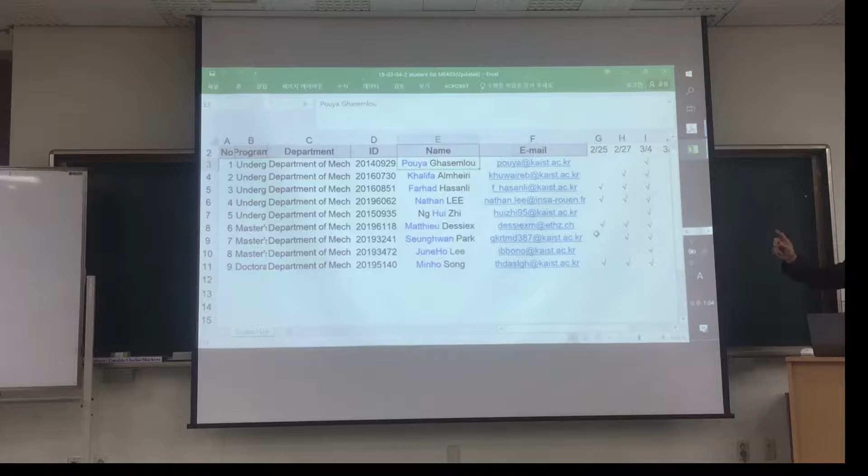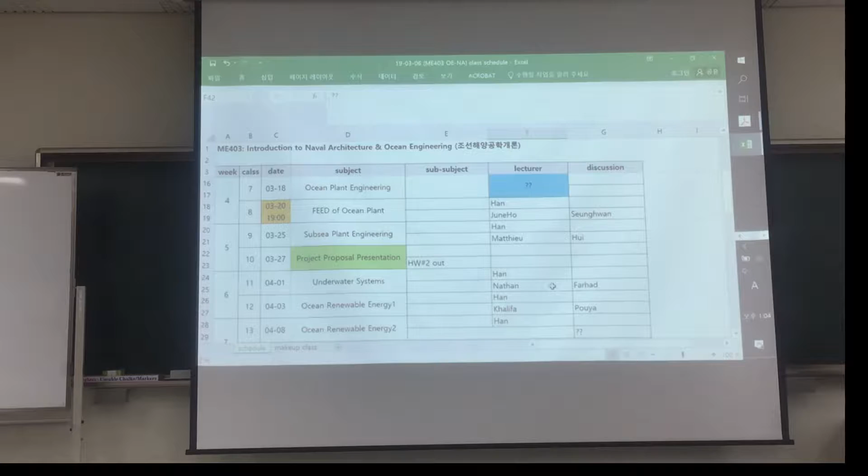Minho, JuneHo, right, I'll change this one. All right, and you get this one, but it is very tentative. I just write down your name somewhere, but it will change. Last night I just made this one, but this one is very similar to last year, so I just copied and changed some of it.

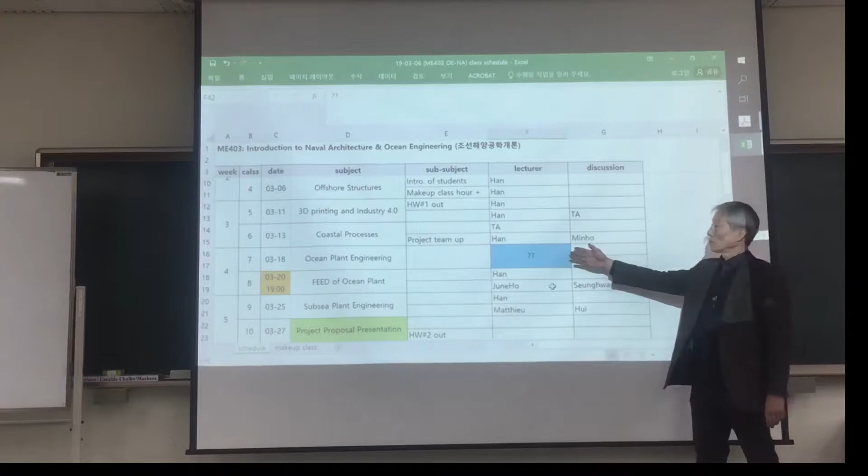And this was a special lecture by another professor. And sometimes this one means late evening class, because of my trip, sometimes I go abroad using video and online teleconference tools. I found that using teleconference is better than delaying lectures or rescheduling, so nowadays I prefer to have one, but it depends on the time difference.

So this time I have a plan to go to France, Toulouse, in May. At that time I found that 1 o'clock is not good for myself, so I may try, say, 7 o'clock in the morning. Then for you, what time would it be? 8 hour difference, so it's 5 o'clock something. Anyway, we will find out the proper time.

And also sometimes we need replacement hours, in case you reschedule time or day. So we will find out today's makeup class hours, something like this. You will find out the available time slots of the whole week for 9 people. I guess your class schedules are fixed.

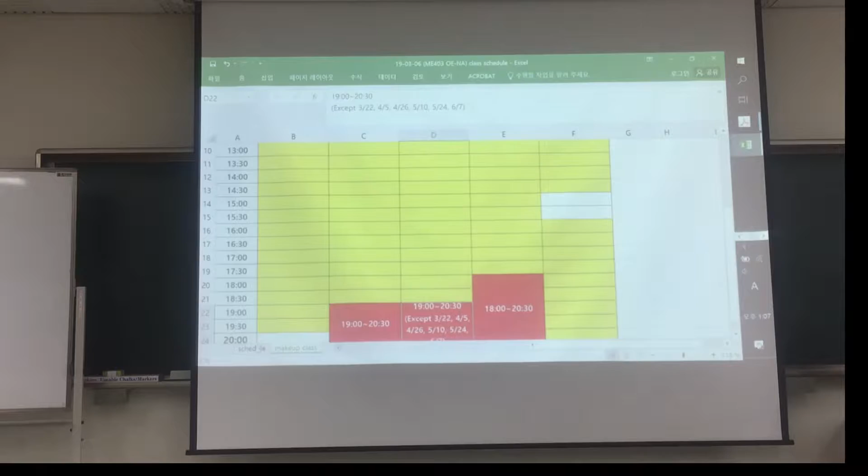We'll do that today. And also introduction of students - you will each have 1 minute to introduce yourself near break time, after 30 or 40 minutes.

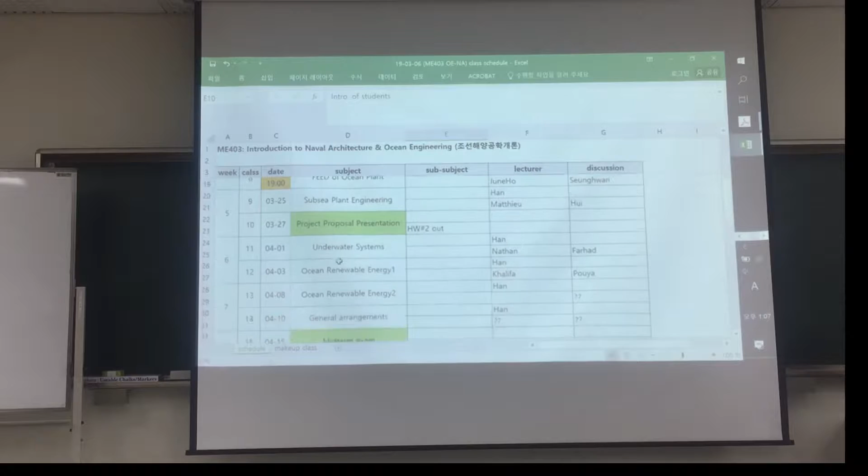So this is the project proposal presentation and midterm exam. This is the exam, proposal, and special lecture. And for this one I will have a plan to visit Toulouse, France, so we'll find out the proper time. Fortunately, if we do it this way, then one class can serve as the midterm exam.

Do you have the exam week schedule? Can you check whether it is the same week as this one, or whether the whole university has one week of exams - the midterm exam period?

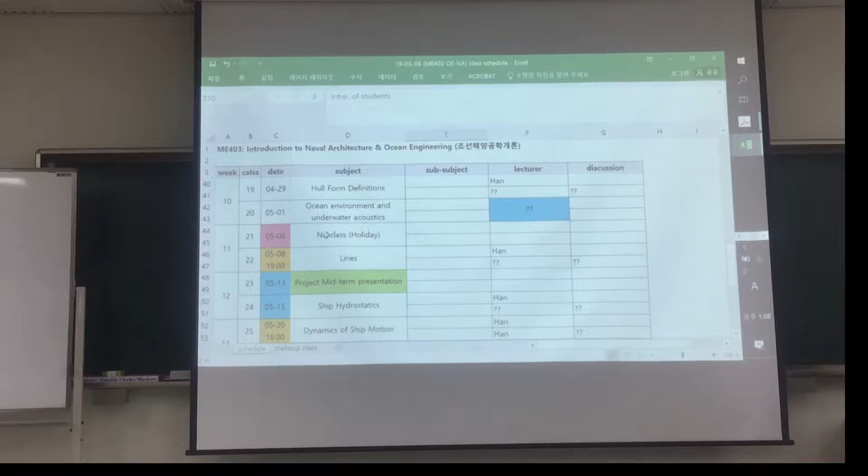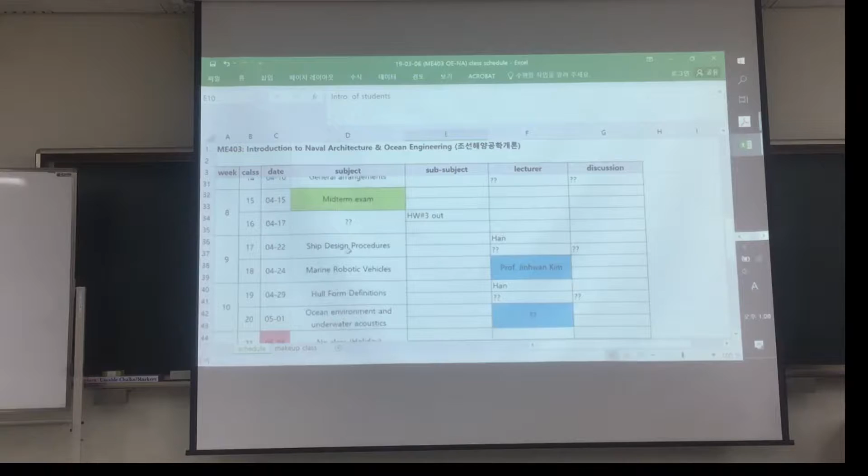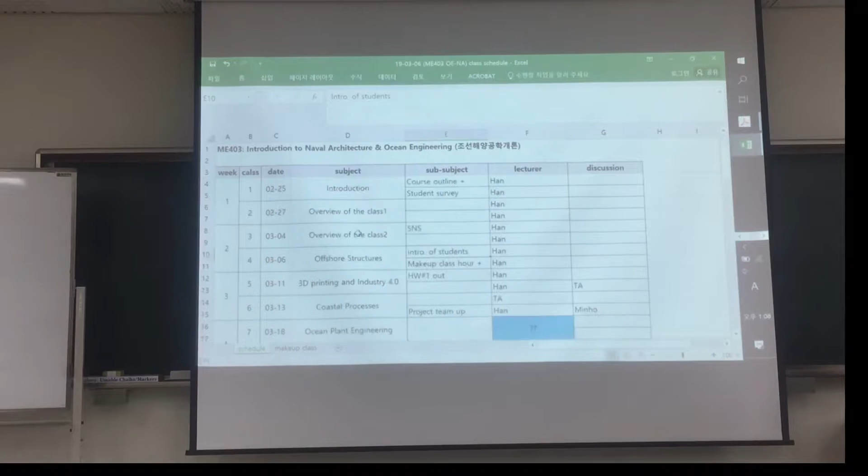Right, okay, so we will change this one. But anyway, you will do it this way. So I hope the TA starts to show how it is operating.

So next week, Monday, TA Kijong will lead your discussion time. After that, right - midterm presentation is the term project presentation.

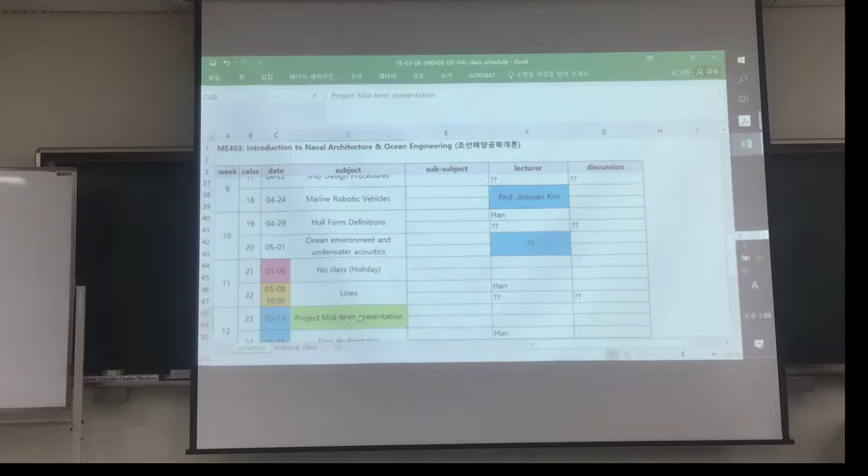Term project is the project proposal. This is a written exam. This is the project, the term project. But these are classes, lectures, similar to my own lectures on chapters of the textbook.

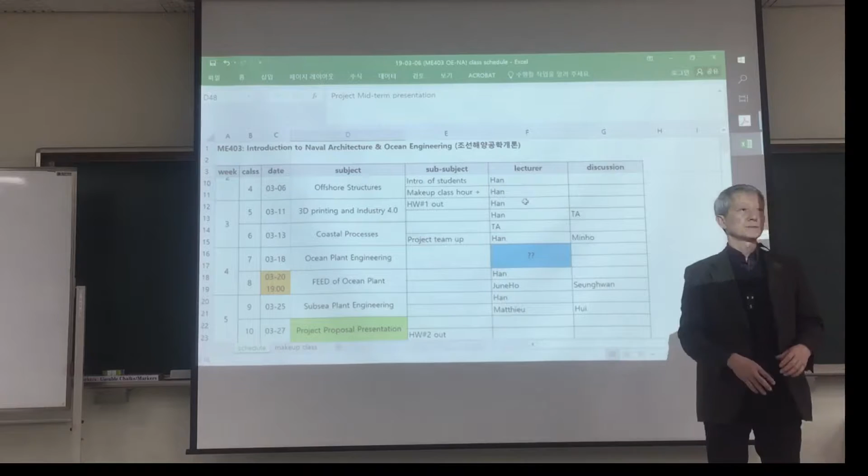Homework? How much time per - sorry, say again. Usually I give you 2 weeks time until the submission deadline.

Same as myself as a lecturer. And I will provide the previous PowerPoint file, the old one, so you can update that one or use it as is, as you like.

And also you can see the previous year's lecture video. There are also student lecture videos on YouTube, so you can see how they did it. It's similar to a lecture - I'll provide the old material to you.

Okay, any other questions? Yes. Right. Right.

Fit the amount of lecture to the time slot rather than the amount of slides. You should finish by 25 minutes. We have 75 minutes of class per day, so I divide them into 3 parts - each one is 25 minutes. So 25 minutes of my lecture, 25 minutes of student lecture, 25 minutes of discussion led by a student.

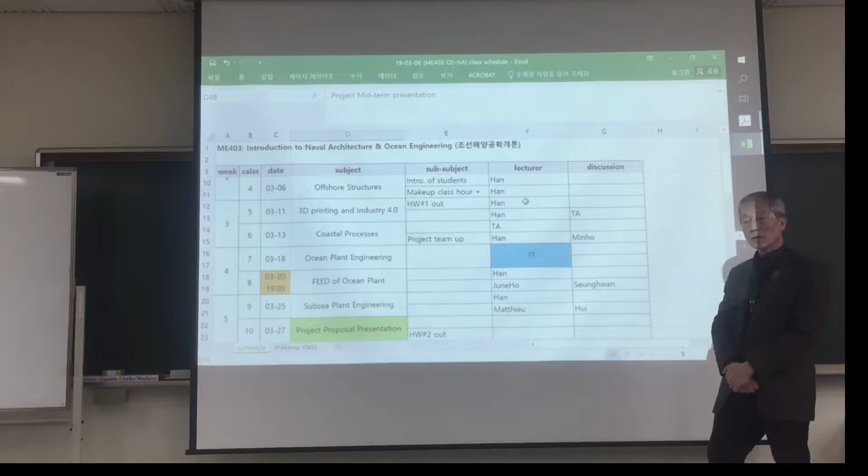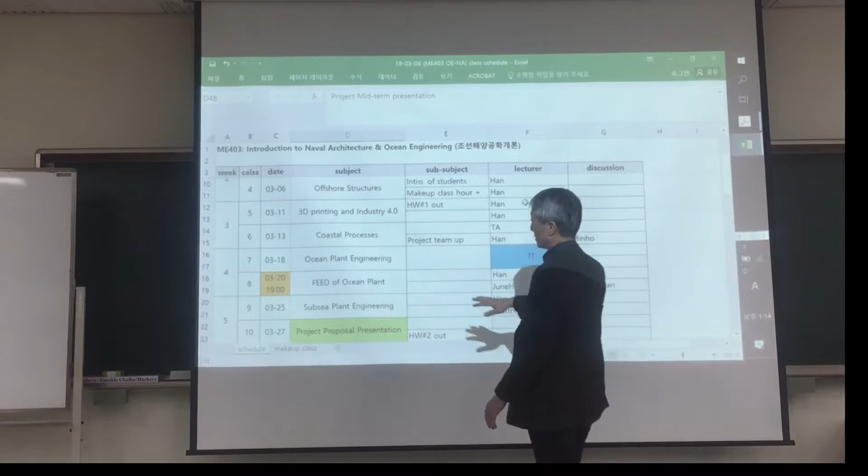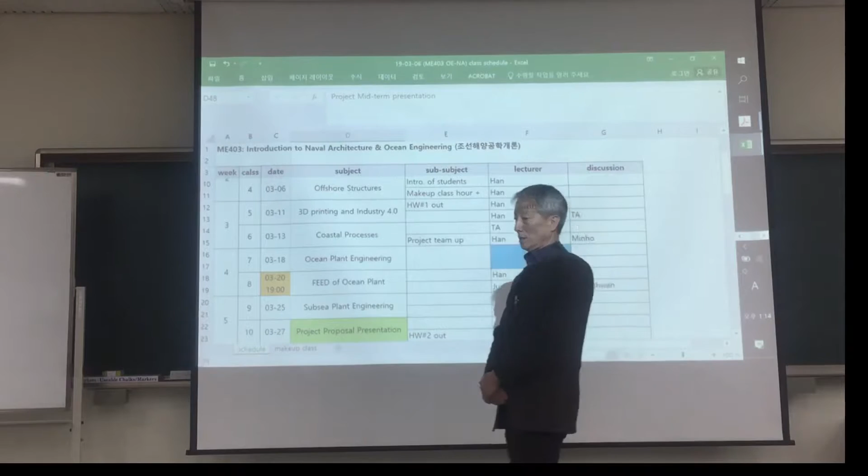Anything about ocean engineering and naval architecture. I provide you samples of previous semester. At the first lecture note and video, you can see it. You can download the first lecture, right? Introduction to the class. At the end of the slide, there is a sample term project which was done several years ago or last year by a student. So that can be a sample.

That was one slide I copied from their presentation. Yeah, project presentation, term project. Three presentations. Yes, so discussion is also a presentation. Discussion. I hope you talk much, communication, discussion. But should there be also a PPT?

Usually the leader provides several slides because he wants to initiate the talk, the discussion. So usually the leader brings questions. So basically they're very similar, right? No. Lecture is one way, right? Discussion is two-way, right?

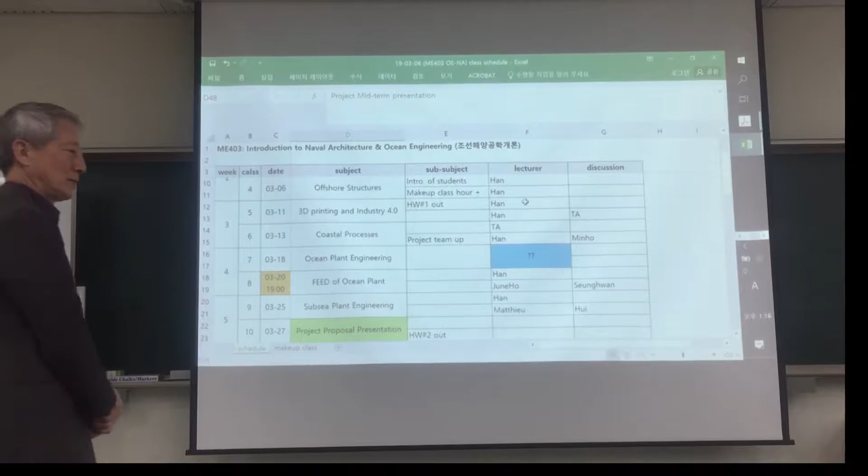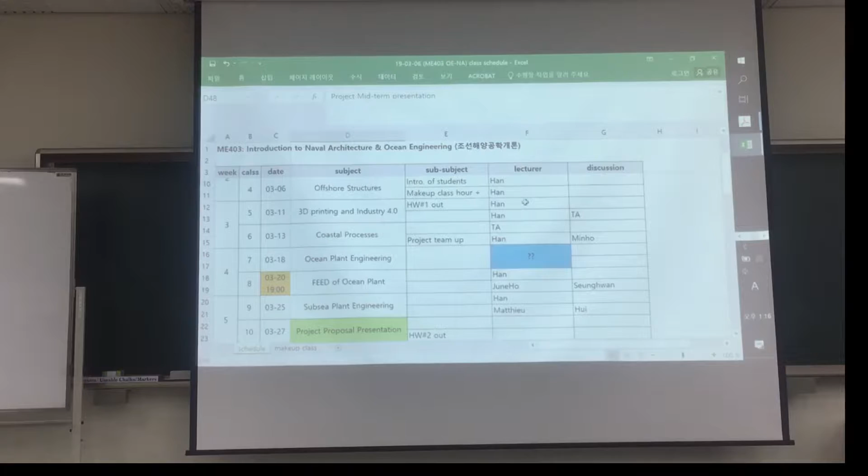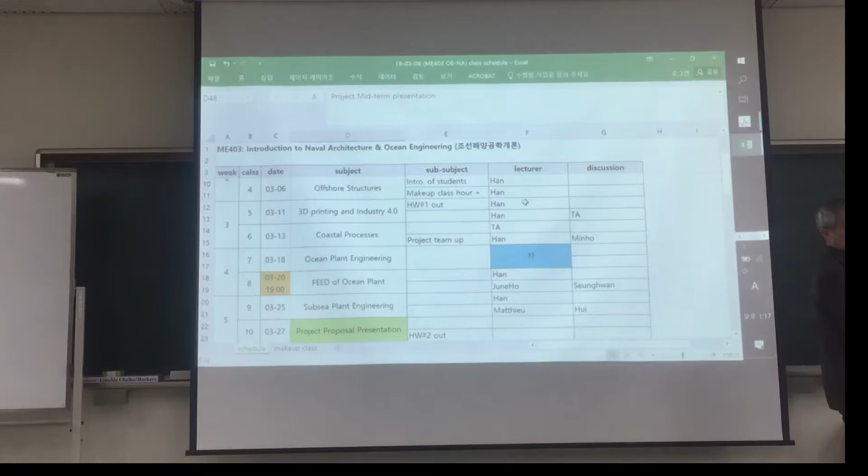So debate. Once I tried to have a real debate, make a party, make two groups, and then you are assigned to agree, and the other side is assigned to not agree, and then try to debate. But it takes more time and effort by yourself. So I just recommend you. So try to see the previous slide. All right. Okay, let's try.

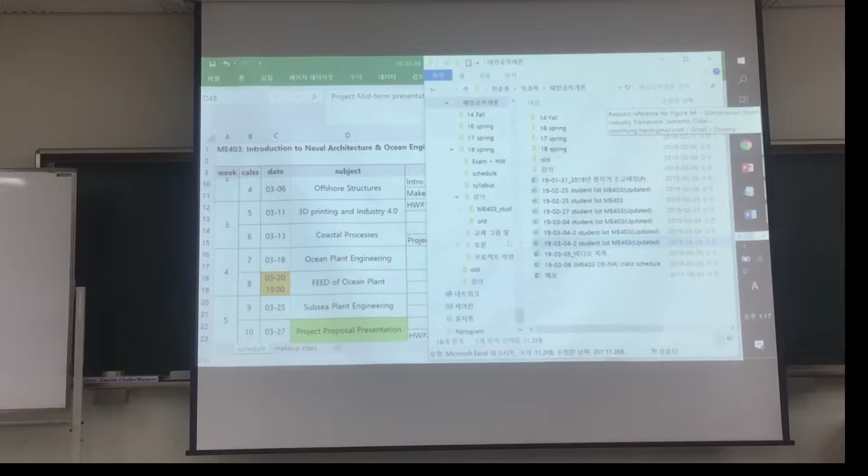I provide you this one, right? Last night, I threw it on KakaoTalk. Yeah. Do you have any problem using KakaoTalk and downloading files? No, it's okay, right? I stopped here, right? Then we can continue.

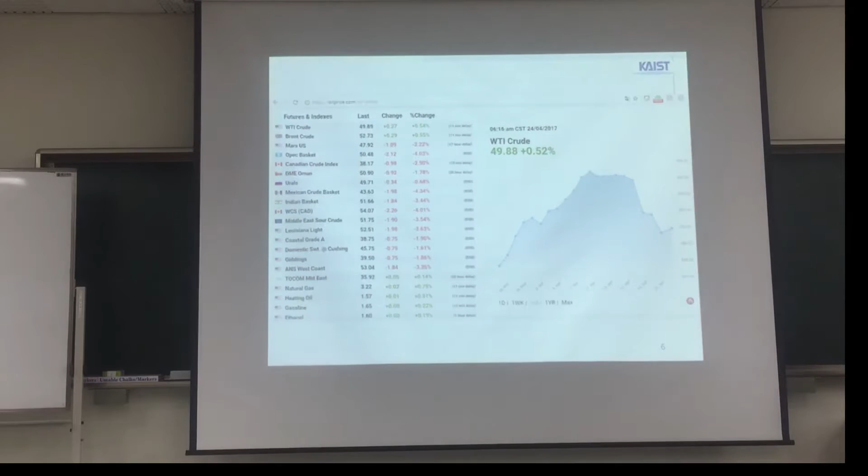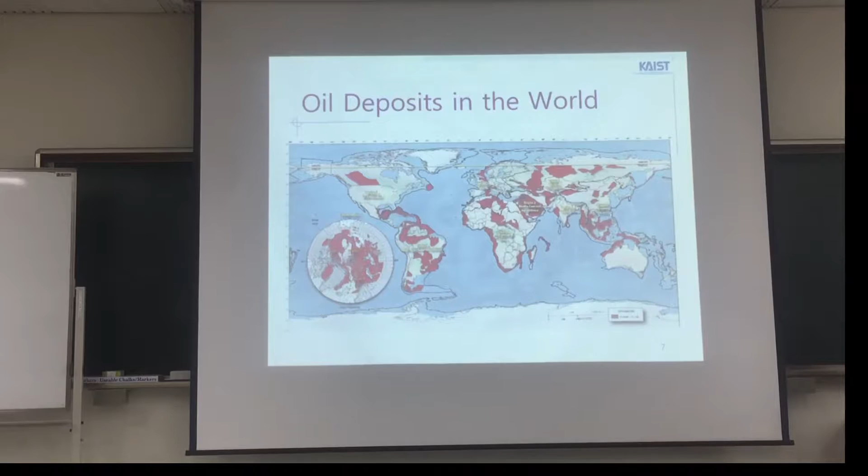Oh, many, right. But now things are changing because of the gas coming from shale gas. But the map can be redrawn. And this is a development picture.

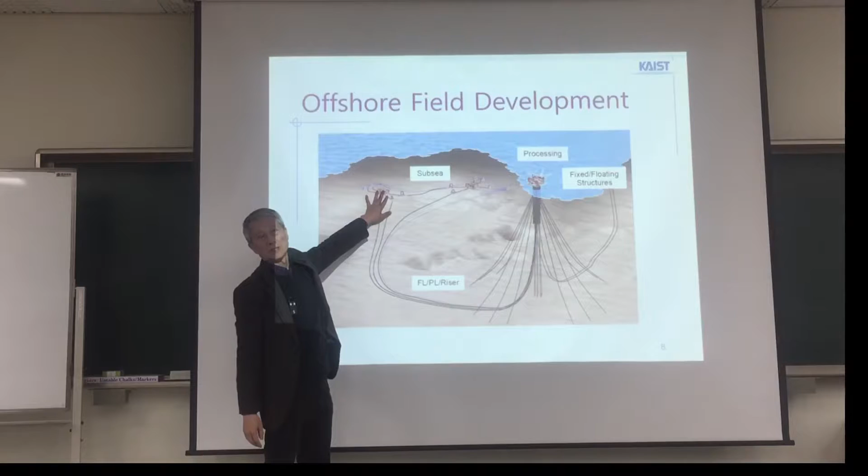Then see that the cable is pipes, right? Pipe. And then subsea, under the ground, say 1,000 meter depths, depending on the sea, ocean. There is a well, similar to the land site drilling for water or oil, right? Oil is coming or gas is coming, and then they collect small productions into a large one and then collect it. So it's something like production rather than exploration.

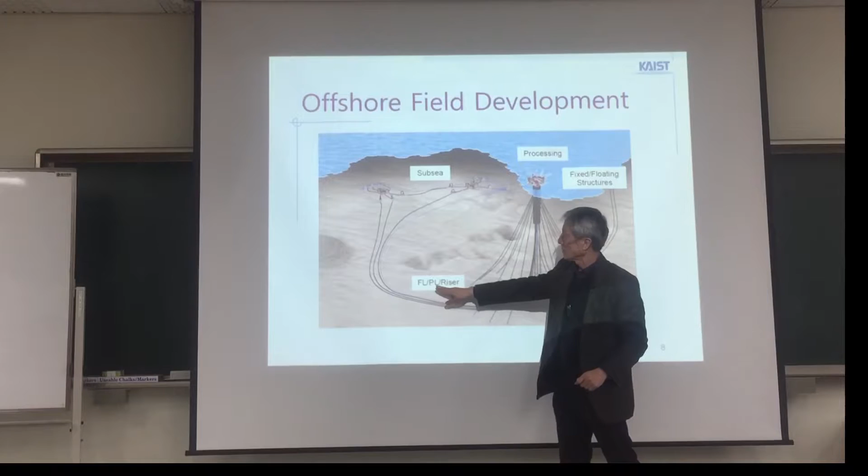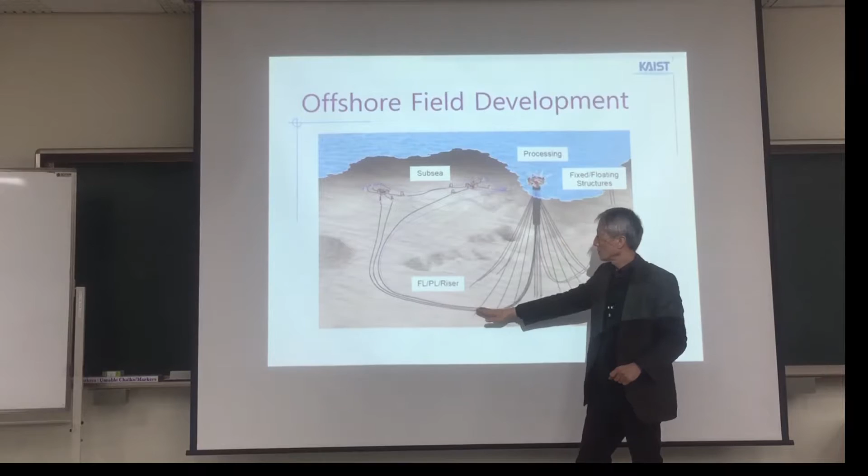Okay, they say they are processing in the subsea unit, and then riser. It says pipeline, flow line, pipeline, and riser is something like the rising part of the pipe, we call it riser. This is a seabed floor pipe, but it goes up to the processing unit. This portion we call a riser.

This is very important. At the Gulf of Mexico, there has been a big disaster, an explosion, about 5 years ago, more than 5 years ago. Very big explosion there, Gulf of Mexico. It was an operation by British Petroleum, BP. So they had big damage from this explosion. And the burning oil lasted more than months. Explosion and burning for a long time.

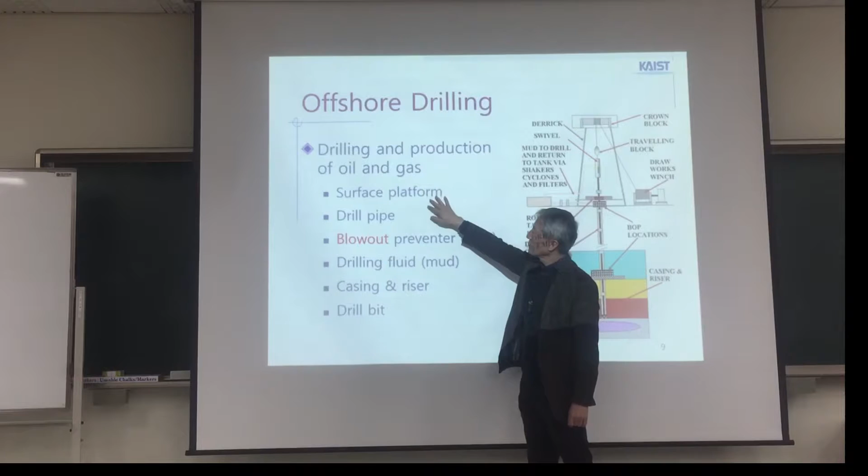And that reason was one of the problems of this part at the time, right? So complex, right? Complex. But anyway, simply this is drilling, right? And the others are supporting material. Drilling and production, oil and gas, surface platform. Surface platform is something like this one. What this means is water surface. And drill pipe.

The pipe is produced by the pipe maker using steel plate, right? They roll and probably weld to make a pipe. Pipe size is something like this one. Not so big, right? Something like this. Not in this way, something like this way. And then it is a finite length. So they purchase pipe and do connection down to depths of several kilometers, right? So they call this a drill pipe.

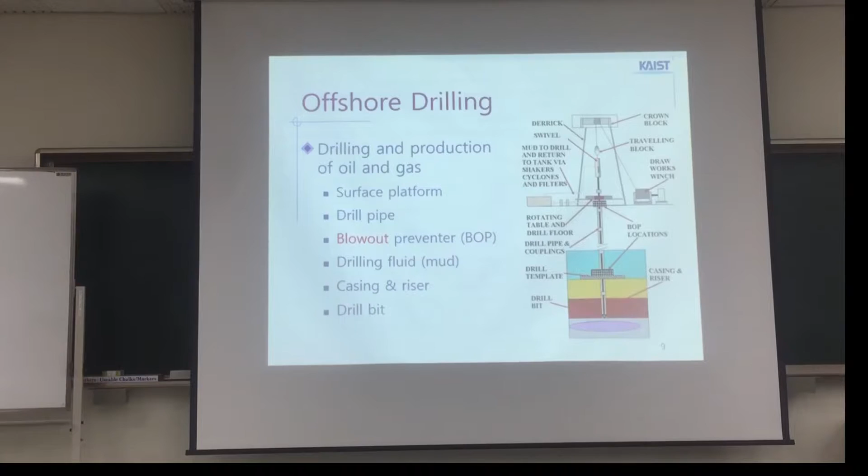And also drilling fluid, they provide some lubrication, water. Usually water is used, but lubrication is needed for the drilling. And then casing, riser, and drill bit is the final stage. We'll see more in the later stage.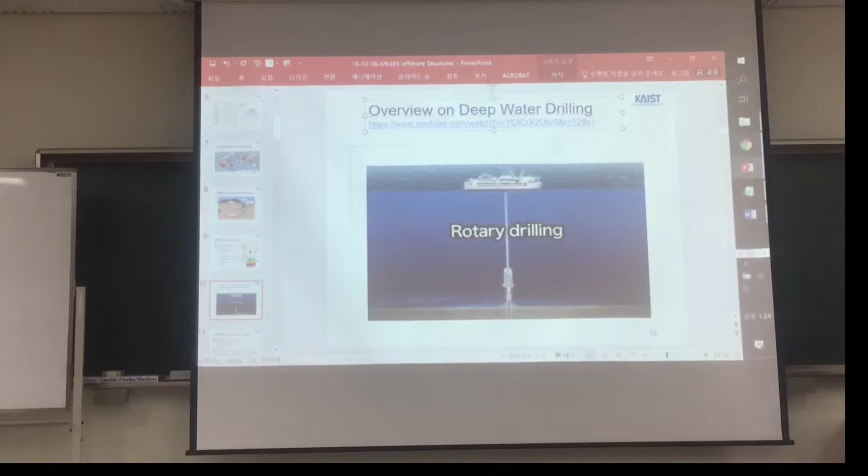Oh, there's a video. Okay. It's not very good. Then, sound. Okay, sounds good.

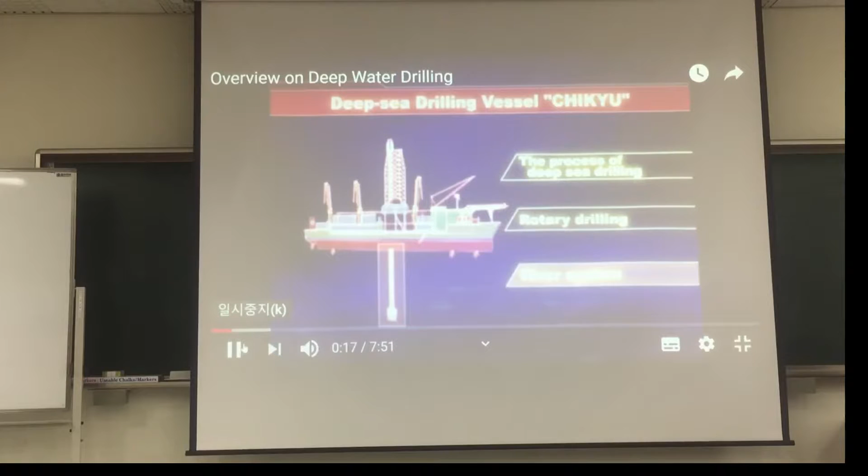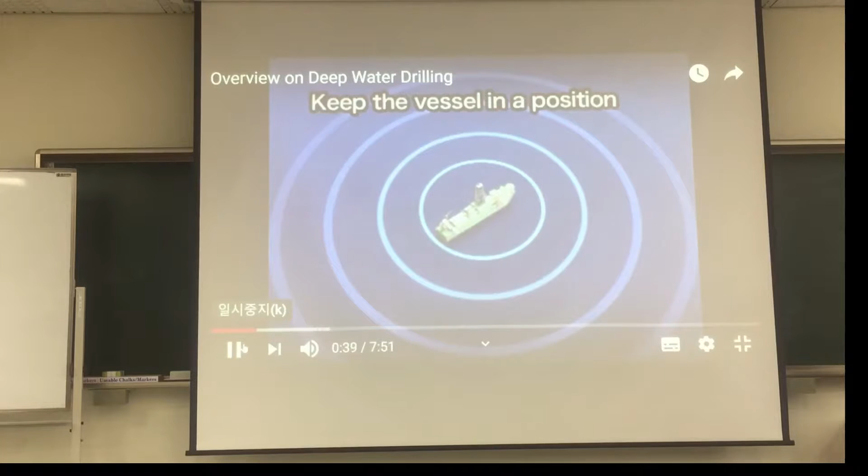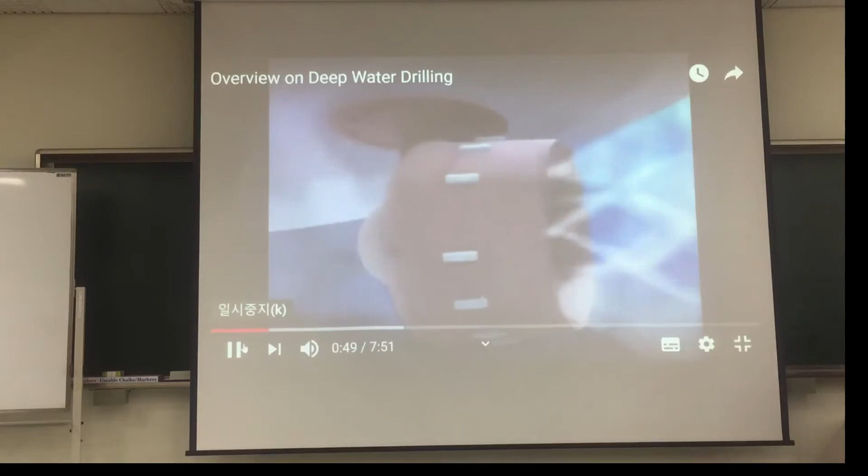When the vessel arrives at the drilling site, it receives a satellite signal that helps the vessel move into the exact position required. The vessel has 6 propellers that rotate a full 360 degrees and keep the vessel in one position, preventing it from drifting due to the wind, waves, or sea current.

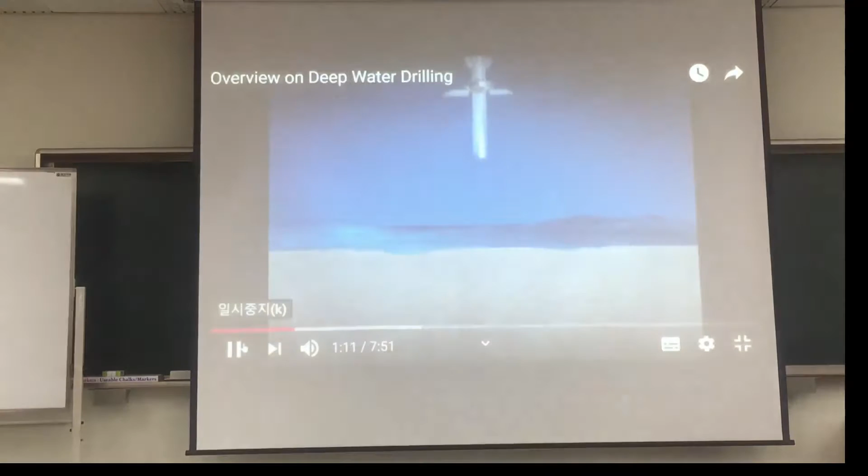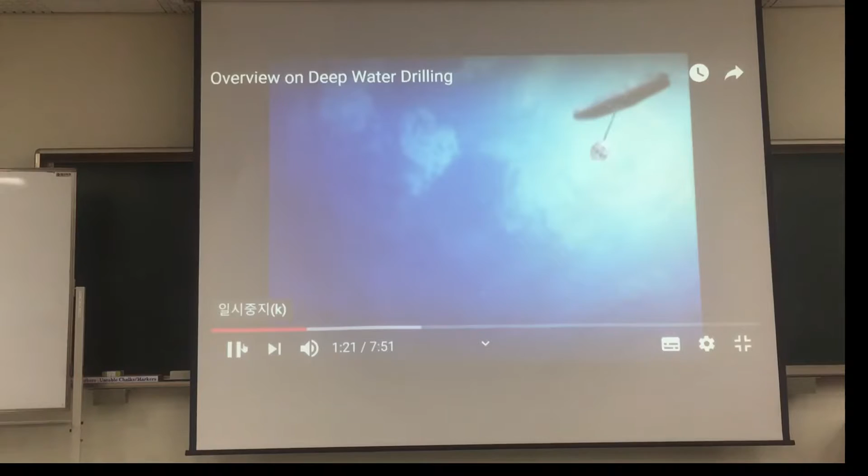First, the conductor pipe is installed. As the drill pipes are connected, the conductor pipe and drive are run down to the seafloor. After the conductor pipe penetrates the seafloor, the drill pipe is released and pulled back to the vessel. A large drill bit connected to the bottom of the drill pipe is run down to the seafloor, and let down to the bottom of the hole through the conductor pipe.

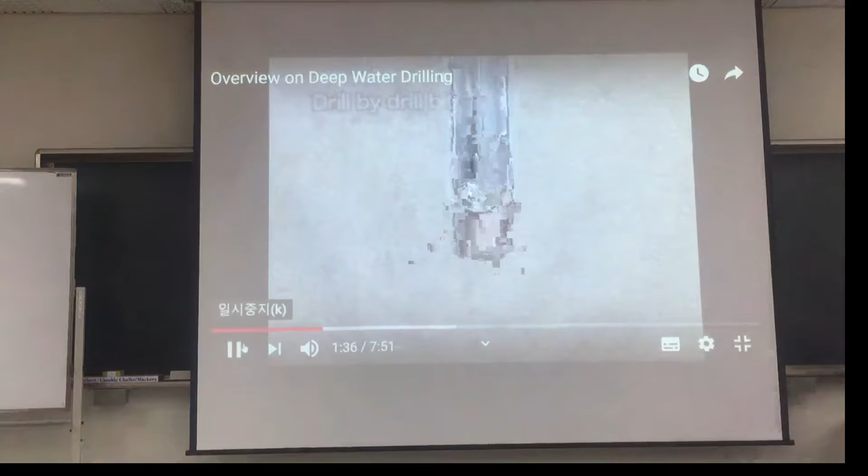The drill bit rotates and drills the sediment and rock below the seabed. Seawater is sprayed from nozzles on the drill bit to raise the cuttings to the seafloor. After drilling several hundred meters, the drill bit is pulled back to the vessel.

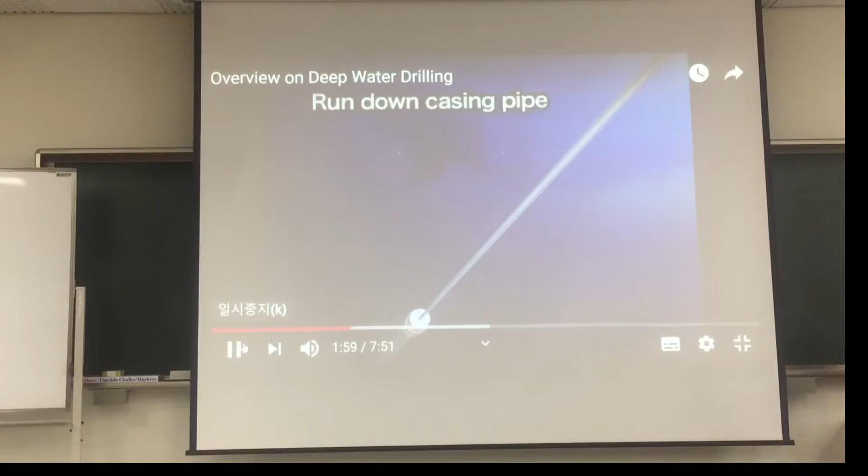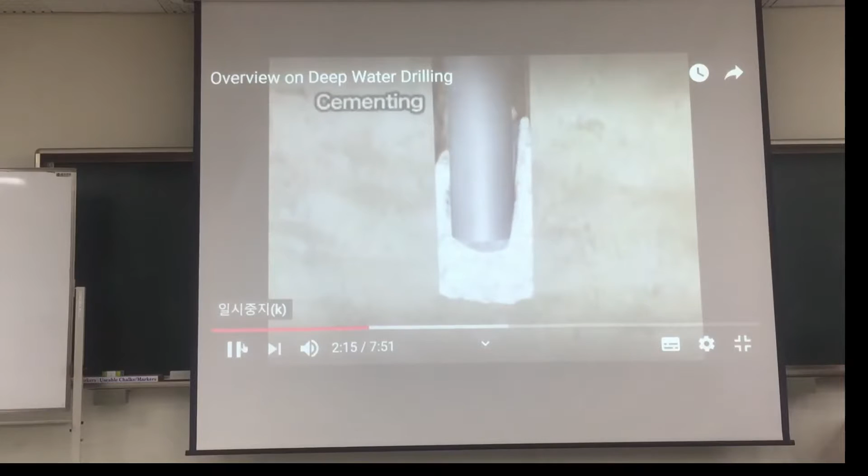A casing pipe, about 50 centimeters in diameter, is set into the drilled hole to keep it from collapsing. The casing pipe is run down through the conductor pipe and is inserted into the hole using the drill pipe. Cement is pumped into the space between the hole and the casing pipe to fix the pipe in place. After cementing, the drill pipe is released and pulled back to the vessel.

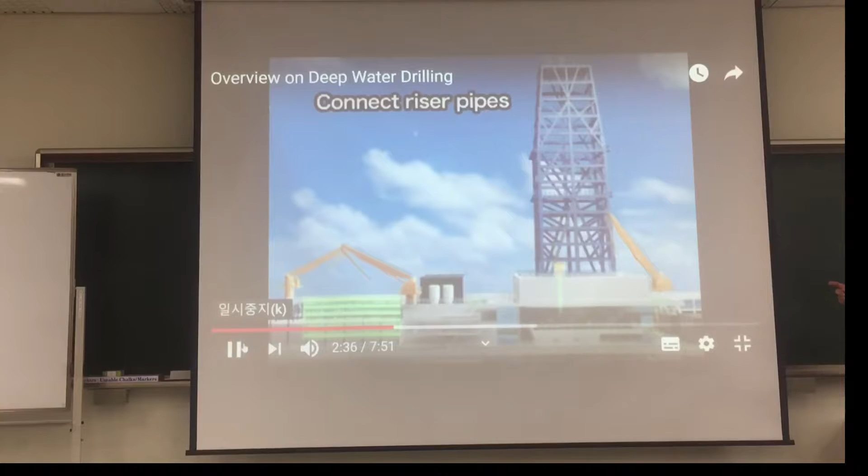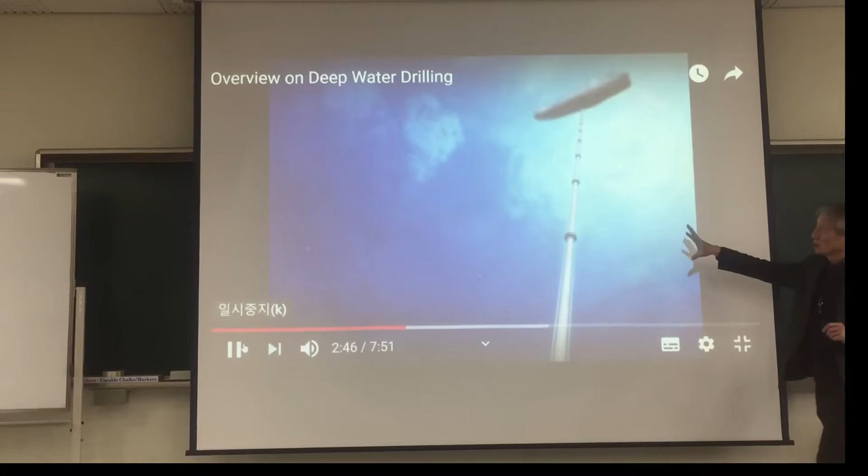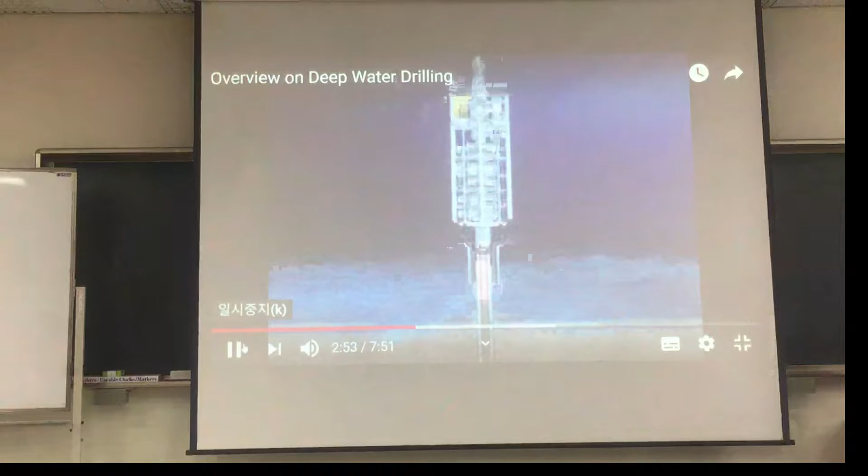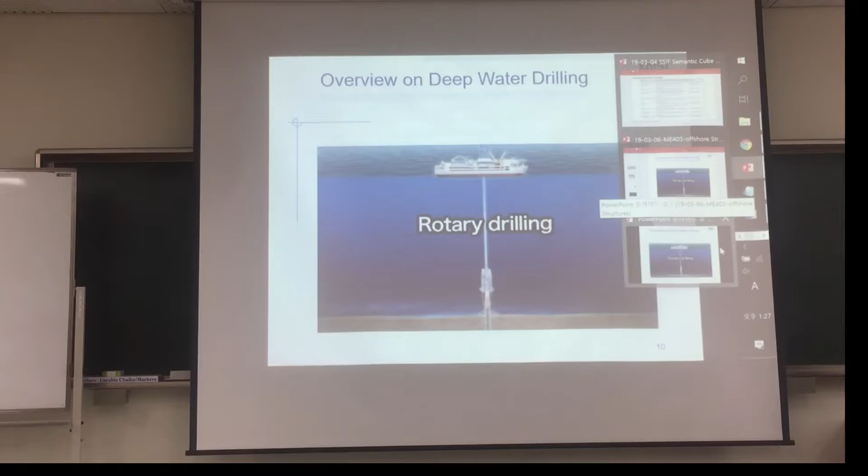Okay, that's enough for today. So you can see more if you like. Right, so you can get the idea. And types...

Among offshore drilling systems, there's a jackup drilling rig. Jackup is something like a tower, so they have a footing on the ground. Semi-submersible is something like a submarine, but not fully submerged, so it's a semi-submerged one. Then there's the drill ship, which is almost like a ship but has a tower on top, so that they can provide offshore oil and gas production.

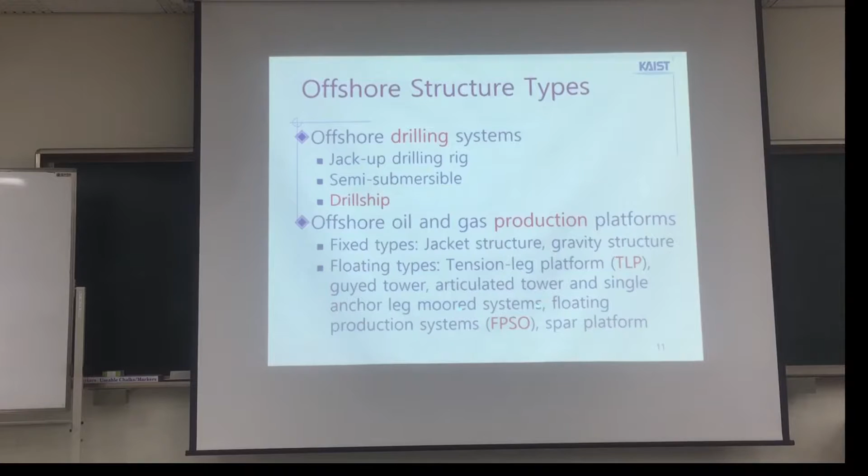Platform types: fixed type is same as a jack-up. Fixed type includes jack-up structure, jacket, and gravity structure—we'll see the pictures later. Fixed means the footing is fixed, same as on land. But as the water gets deeper, we need a floating type. There are several different ones: tension leg platform, guyed tower, articulated tower, single anchor leg mooring, FPSO, and SPAR. Many different types—we'll see that.

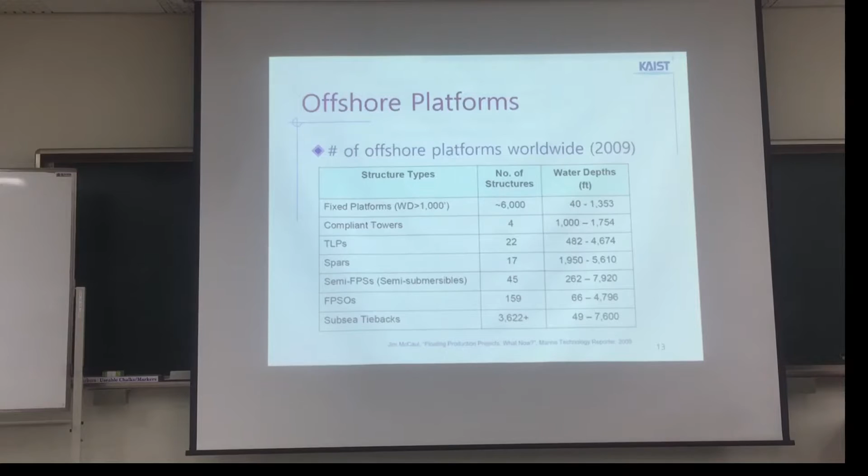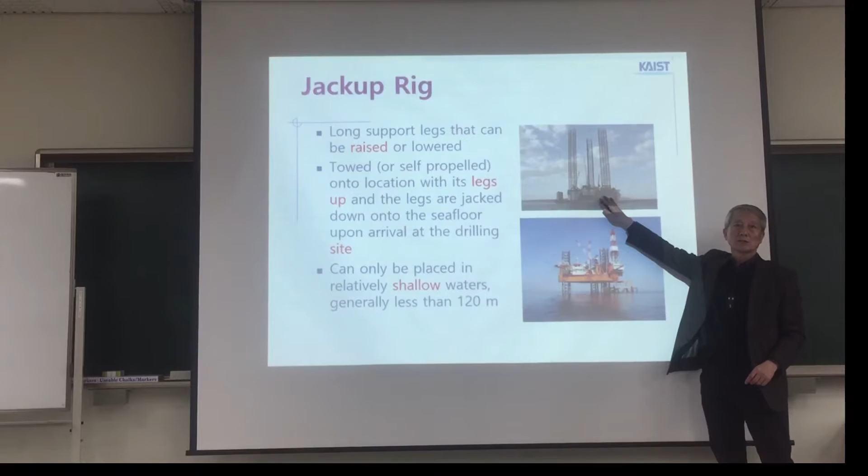A jack-up rig looks like this, with long support legs that can be raised and lowered for transportation. Say it was constructed in South Korea and moved to Indonesia or East Saudi Arabia - for transportation you need to jack up the legs. A leg might be 500 meters, so you don't want it undersea, so it goes up above the water like this. Then at the site, you lower it down. So we call it jack-up.

Something like an elevator, and then they find the footing there, fixed. It's a towing condition - towed or self-propelled - but usually they tow it to the location with its legs up, and the legs are jacked down onto the seafloor upon arrival at the drilling site. It can only be placed in relatively shallow waters, generally less than 120 meters.

Question. Fixed platform, similar, right? Jackets also.

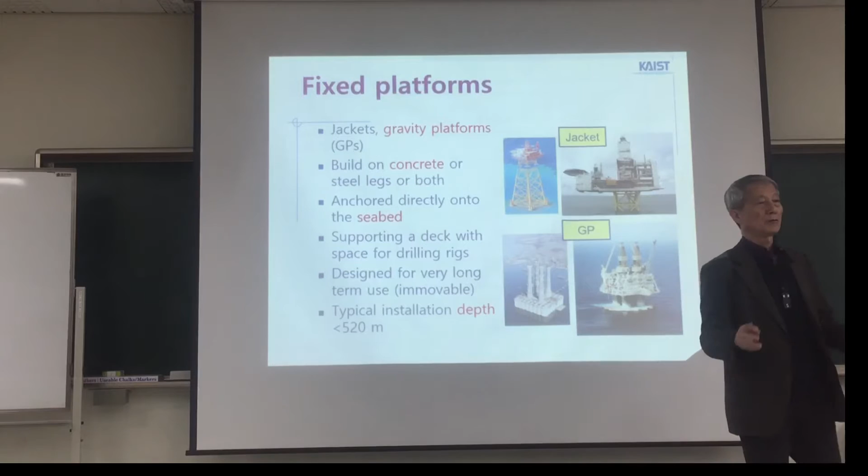Gravity platform is like this - this is a famous one, made by Norway several tens of years ago. It's made of concrete structure, and it has heavy tanks so that it can be submerged. But once built, they transported it floating. These are concrete tanks, so at the site they put water inside, so it submerges down and stays there for operation.

The structure here is the same - it's submerged down, and on top of these pillars there's a structure for the processing unit. You can call it a factory, a refinery factory, processing unit - we call it processing.

Built on concrete - this one is built on concrete, made of probably steel or concrete, or both, anchored directly onto the seabed, supporting a deck with space for drilling rigs, so you can do operations. This is a hotel facility where the personnel stay, but this is an operational unit - you can call it a factory.

Designed for very long-term use, sometimes immovable. You can float it again, but usually it stays longer because the operation is very complex. Also the topside is heavy, so it's not easy to move. Installation depth 500 meters.

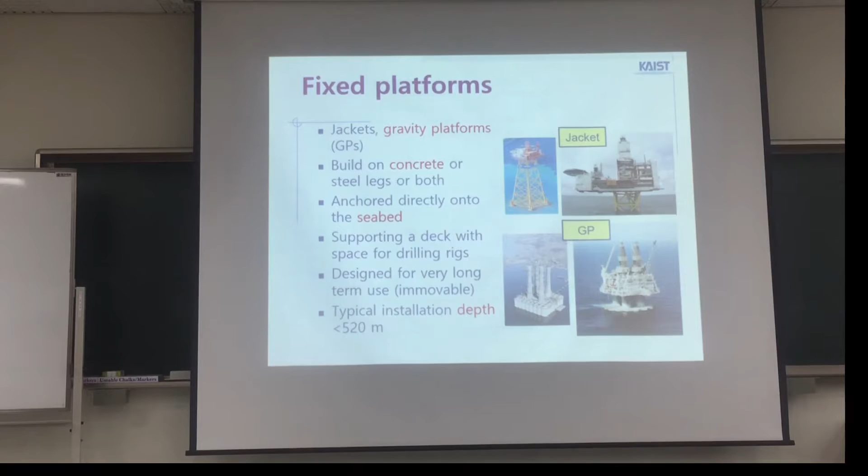Tension leg platform - this is something like a floating one, but there are very strong tying lines. We call this a tendon, or tether. This looks like a line, but it's a strong wire line.

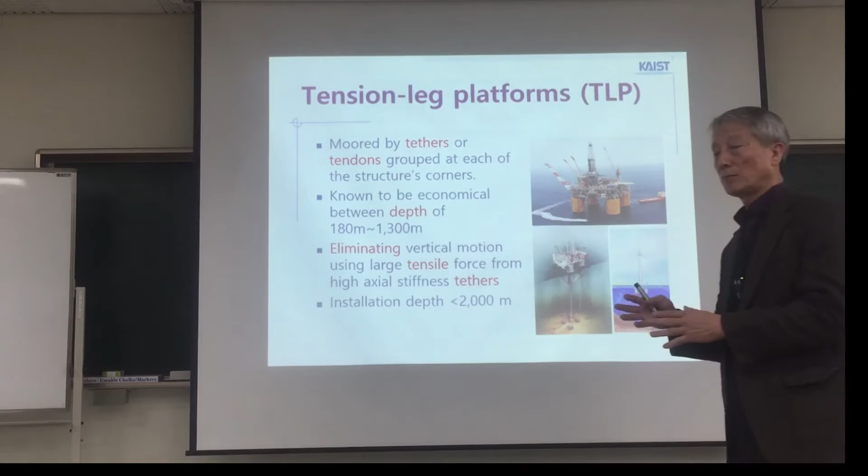The word mooring means to stay still - we call it mooring. It's also used for ships: when a ship arrives at port, it should stay still, not moving at the port side, so they put lines and anchors, many lines, to hold it down while operational cranes are moving. We call this mooring, but a special kind of mooring we call tether and tendon.

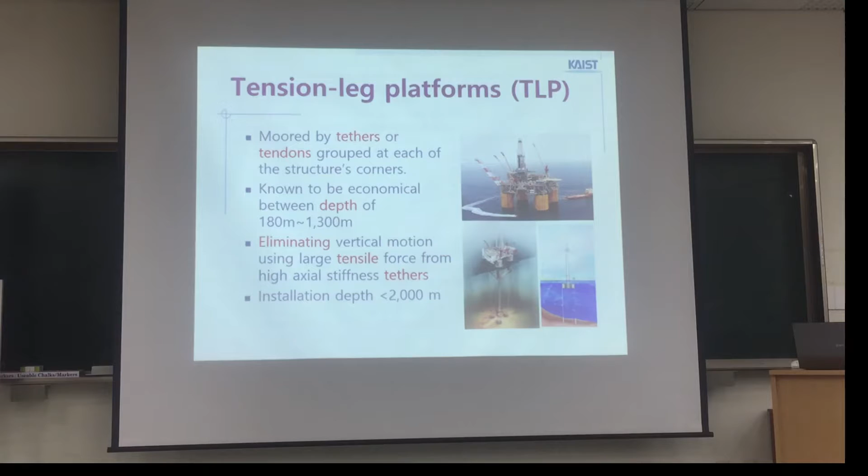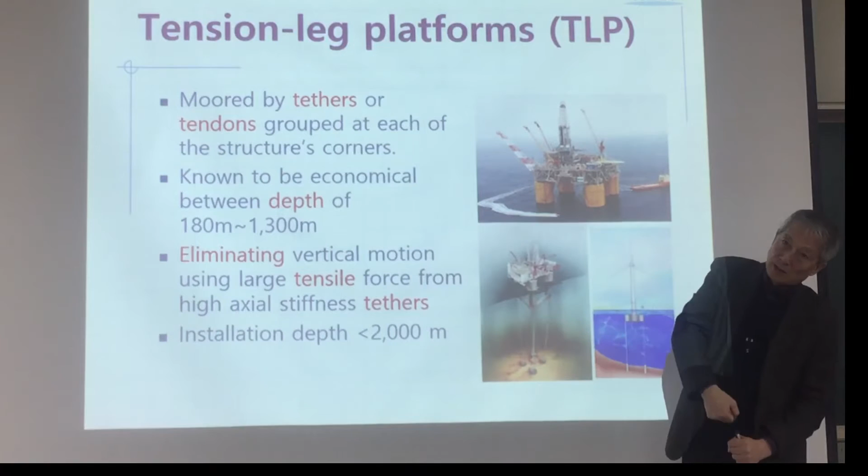These are structures known to be economical between certain depths, eliminating vertical motion using large tensile force. This looks like the footing, which should be strong enough, and along this line tension is applied - high tension. By providing more floating buoyancy, it goes up floating, creating tension along this line, so high tension keeps the structure moving only very slightly due to wave and wind, using high tension. So we call this tension leg.

Eliminating vertical motion - because waves come and the ship moves up and down, they don't want that since drilling is going on, so the platform should stay in position. This is large tensile force from a high axial stiffness tether. Installation at 2 kilometers - that means the water depth.

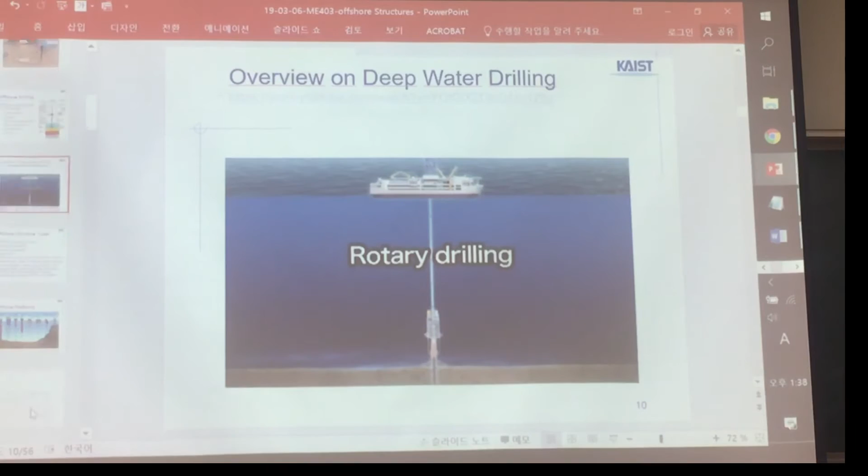And this is also another video. No, it's only a picture, right? No video. It's a video. Oh, it's a video, okay. So you'll see here shortly.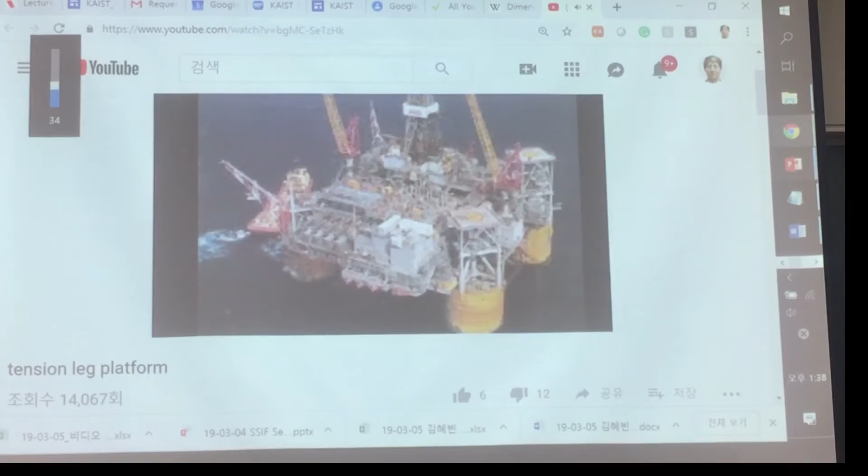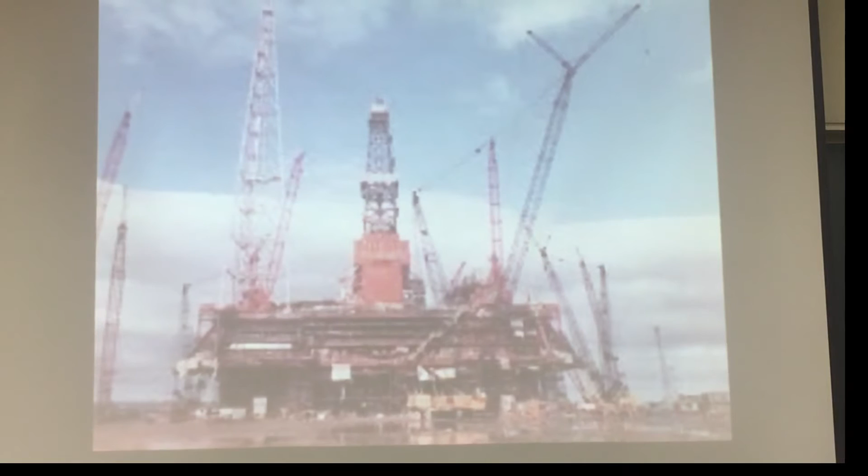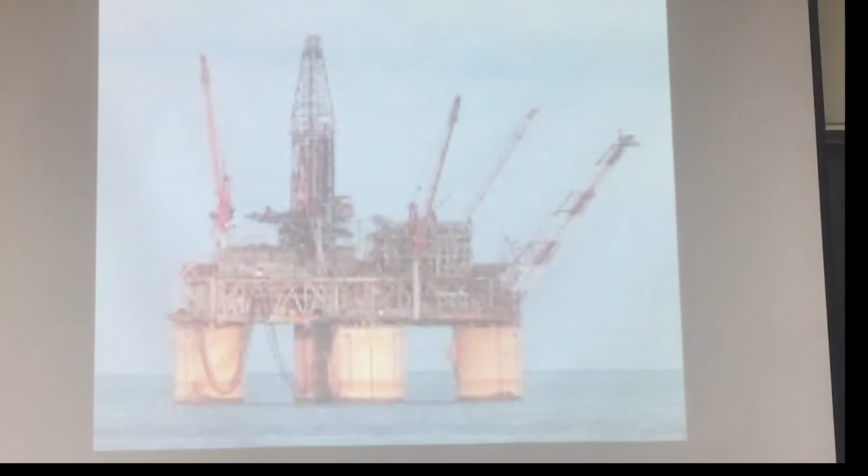Quality is not good, but anyway you can see the tether - this is the structure above the water. This is a tether, the tension leg is here, this is a drill pipes unit. The tension leg is this one.

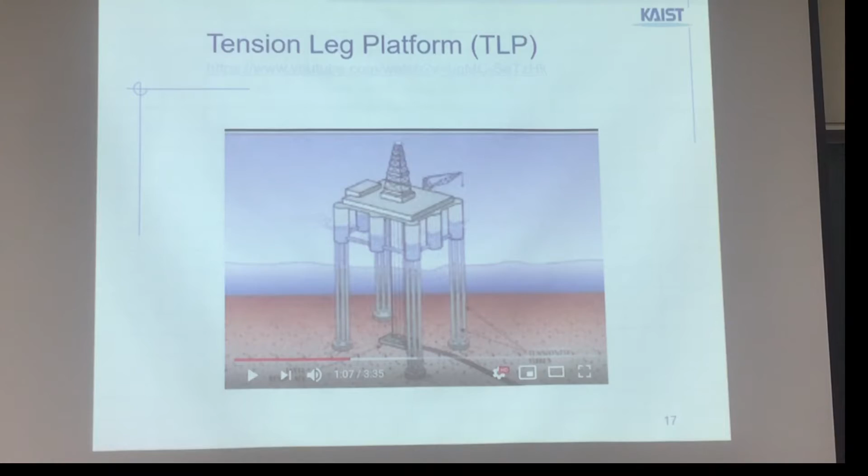Overloaded line, we call this draft line. You can see that this part is only above water when submerged, and this part provides floating power to support the structure above. This is a heavyweight factory, but that buoyancy is coming from this submerged part.

Obtaining buoyancy from a ballasted watertight pontoon. We call this a pontoon. And ballasting means water inside or outside, empty or filled.

Before we saw this one, these are concrete cylinders, almost empty, so that this whole unit is floating. When the location is arrived, they fill it with water. We call this ballasting.

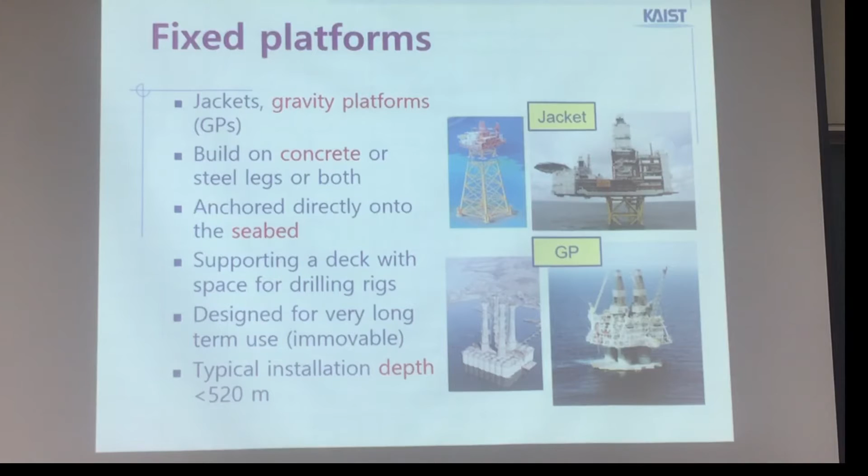Ballasting, how much? It should be a designed amount. We have a calculation; designers should calculate all of this. So we call it ballast. In a ship, there is also a ballast tank inside.

For the Koreans, the Sewol case, the accident, ballast water was a problem. For the ship Sewol, it was a passenger ship at the time.

It had a propeller, but there was a high superstructure of hotel facilities. As I told you on Monday, the ship Sewol was imported from Japan as a used ship, and they renovated it.

But when they renovated it, they added another layer, to provide more rooms. Room means money. So for stability, they were required to put more water here.

We call this the ballast water tank. To cancel out the weight going up from the extra floor, they provided more water at the bottom to balance and create stability there.

We'll see more about this in a later stage. So I'm trying to explain about ballasting, watertight pontoons, this one.

Deeply submerged, it looks not deep, right? It looks shallow, but because the size of the structure is several hundred meters, say 300 meters, the depth can be more than 100 meters. We can say they have a deeply submerged hull. What is the threshold value of deepness?

Usually we refer to the length of the wave that's coming, the wavelength. In the ocean there is always a wave—short wave, small wave, but sometimes big, high waves come. The structure should be designed to be safe enough for when the high wave is coming.

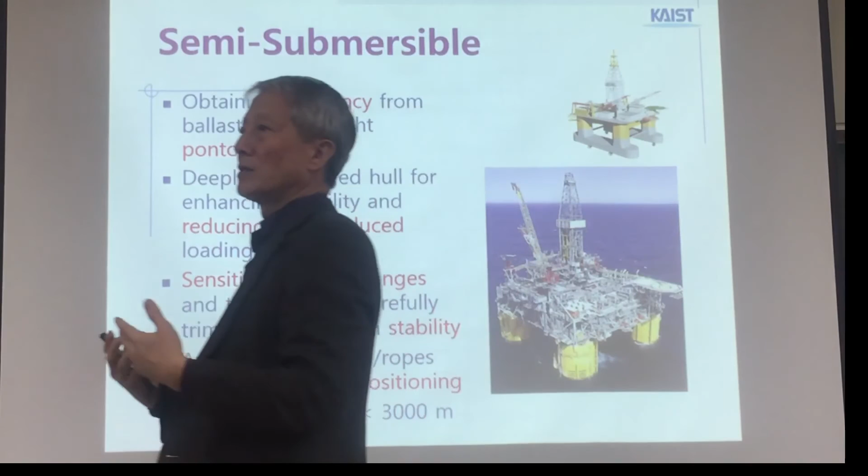So that can be the design wave condition, for designers, which you will see in a later step. And then the length of the wave—like a cosine wave, sine wave—imagine this: wavelength, one single cycle, and that is a finite number. Deep water means it is deeper than this wavelength.

So 100 meters is a lot. Enhancing stability and reducing wave-induced loading—once again, if the depth is higher than the length of the wave, there is no disturbance by the wave.

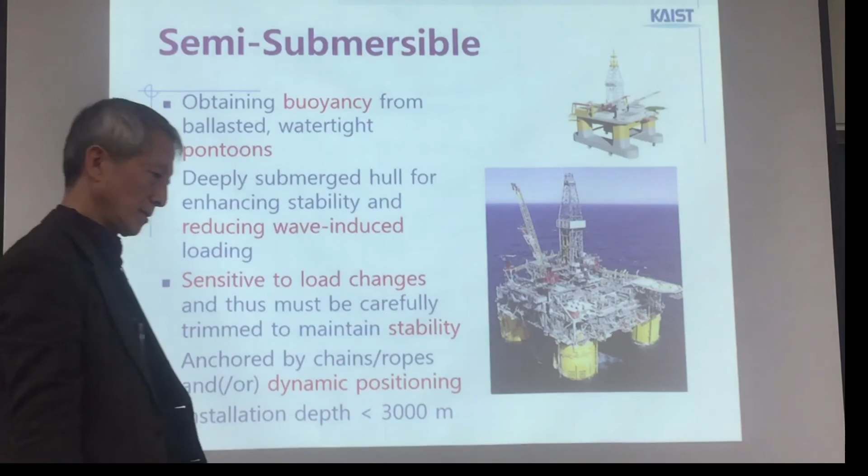가두리 양식장, how can I say this in English? Fish farming, small size fish farming. There are many around coastal areas, also in Korea. They usually have a cage, say 10 or 20 meters wide, and then fish are inside.

They provide something for them to eat. But the problem is, when a storm or typhoon is coming, because of the high waves, the cage can break, or if not, the fish can escape. So in that case, they submerge the cage.

How deep? Several tens of meters, 20 or 10. You don't have experience in diving, right, scuba diving—nobody does. But if you go down to the water, say 10 or 20 meters, there's no wave, it's very calm down there.

So this is reducing wave-induced loading. If you submerge something deeper than the length of the wave, the water is very calm there, no wave force.

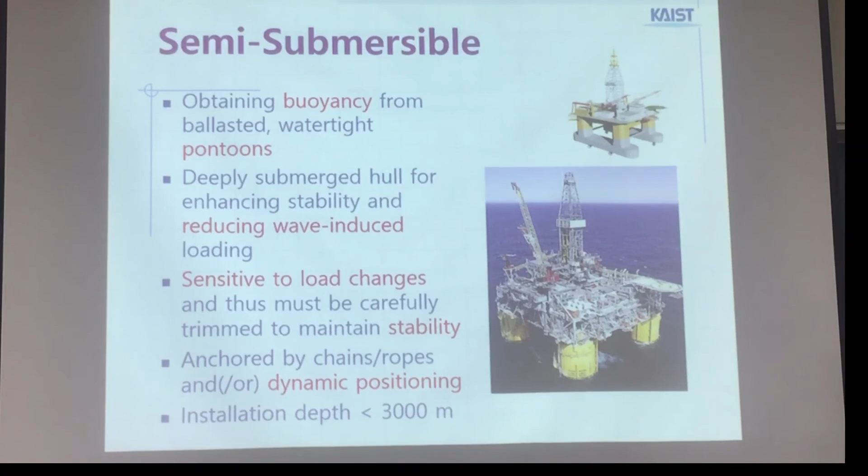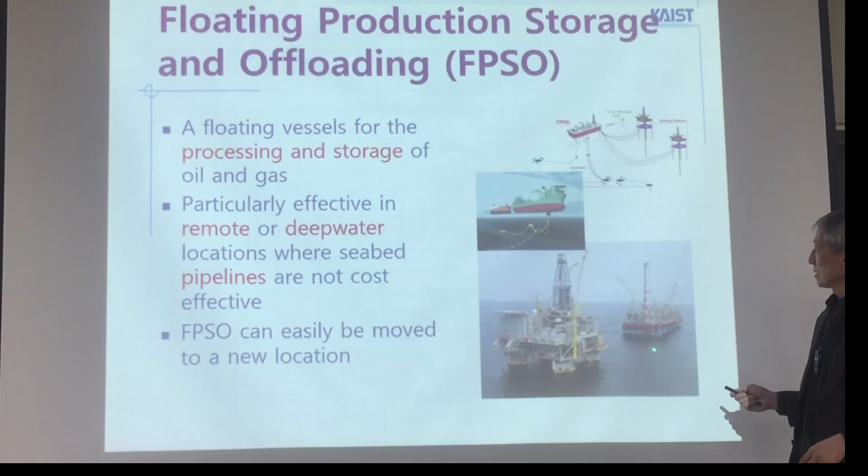Floating production, storage, and offloading—I already explained this slide before. The processing is a factory, storage is in a tank for oil or gas, and it's used in remote, deep water areas because it's floating, not fixed. Seabed pipelines and pipelines up to the land side are not cost effective. They can be easily moved because it looks like a ship—a box ship.